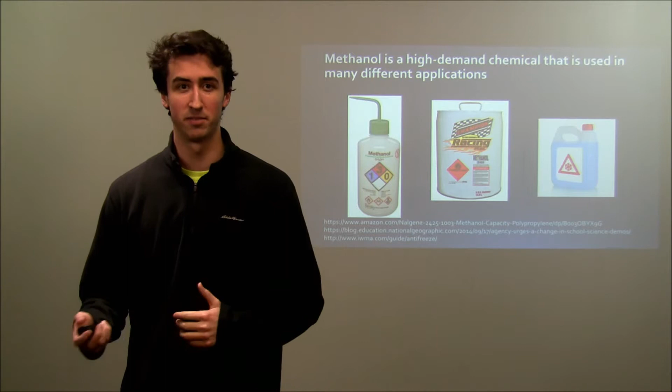So let's move on to each phase. The first part of our design is the natural gas cleanup portion. This is critical because we need to remove impurities such as elemental mercury and hydrogen sulfide from our feed stream, which are found in large quantities. They can do severe damage to materials such as heaters and compressors, and reduce the purity of our methanol product. Starting with the mercury removal units, we used 2 adsorbent columns packed with sulfur-impregnated activated carbon to remove the mercury.

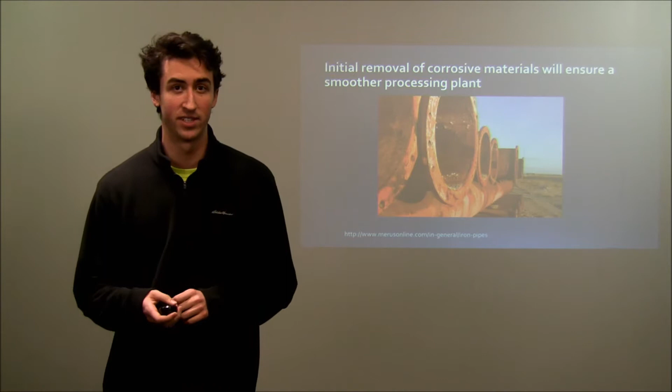Moving to the next section, the sulfur removal units, we used an amine absorption and regeneration unit with monoethanolamine as our absorbent. This removes all acid gas because monoethanolamine has a high loading content for acid gas, and that was the decision behind that factor.

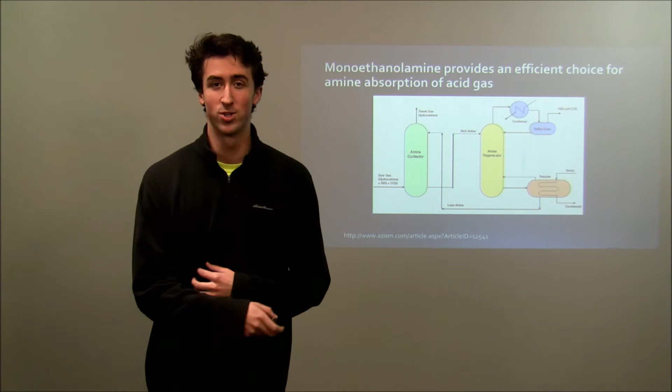Moving along to the next portion of the design, Niall will talk a little bit about the pre-reformer and the reformer part of our design.

Thank you, Mitchell. My name is Niall Robinson, and I worked on section 2 of our methanol production process, which features the pre-reformer and reformer reactors. After the desulfurization unit, we're converting methane and heavy hydrocarbons into syngas, the intermediate between methane and methanol production. Synthesis gas is needed to produce it.

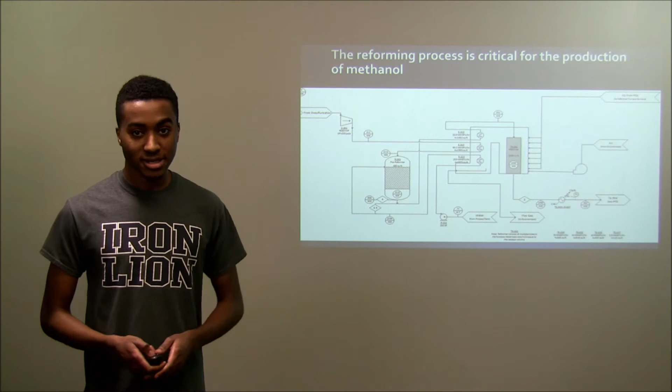The first process is the pre-reformer, which cracks the heavy hydrocarbons into methane and water, and this stream is fed into the reformer where methane is converted into synthesis gas. The pre-reformer is essential because it allows us to utilize the heavy chain hydrocarbons in our feed. Without it, these hydrocarbons would go to waste and either compromise our methanol purity or require more work to separate from the methanol product. By using the pre-reformer, we convert these heavy chain hydrocarbons into methane and then into synthesis gas, so we're not wasting our feed.

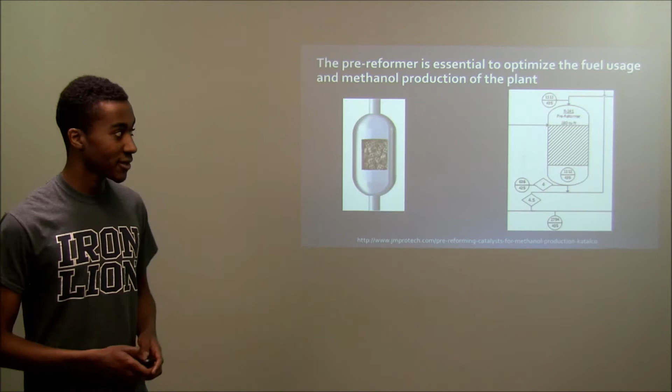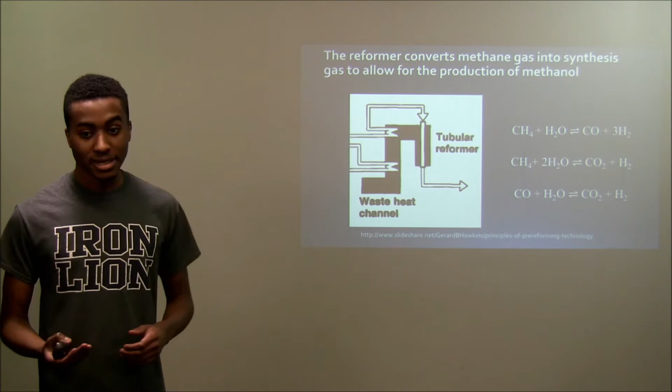In the reformer, all of the methane and water is used to produce carbon dioxide, carbon monoxide, and hydrogen, which is our synthesis gas. It was determined that the optimal temperature for the reformer would be 1500 degrees Fahrenheit, allowing us to get the needed specs of molar concentrations of our synthesis gas. The reformer features numerous tubes where the feed stream is fed through and heated, and when it comes out at the bottom, we have our synthesis gas production.

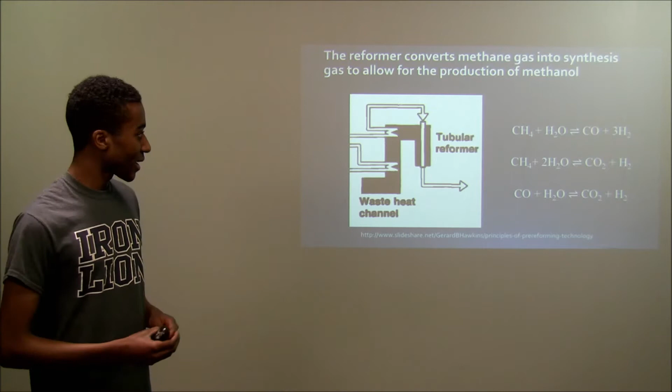After this, it goes into the PSA unit that Mike's going to talk about. So I'm going to hand it over to Mike now so he can talk to you about the third section of our unit. Thank you, Niall, for the introduction.

Now that we've seen the reforming process, I'm going to go through the third section of our methanol plant design, which is where we take the syngas from reforming and turn it into methanol. Before we can move to a reactor, though, we need to make sure that the composition of our syngas is optimized for production of methanol.

So to avoid these problems, we chose to use pressure swing adsorption. The approach here is to remove hydrogen from our feed stream until we reach this desired ratio. This is achieved by adsorbing all the components in our feed except for hydrogen at high pressure, and then once the column is saturated, desorbing at low pressure and feeding all of those desired components to the methanol reactor.

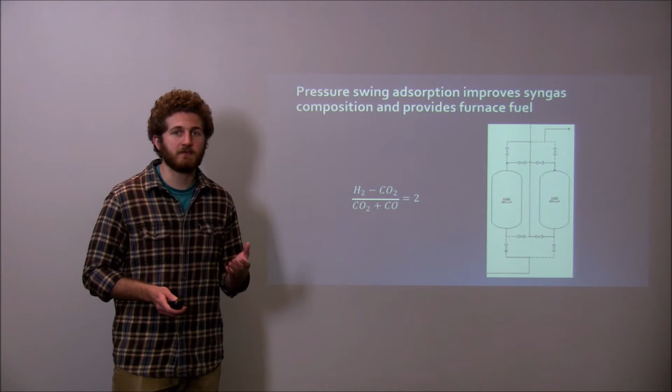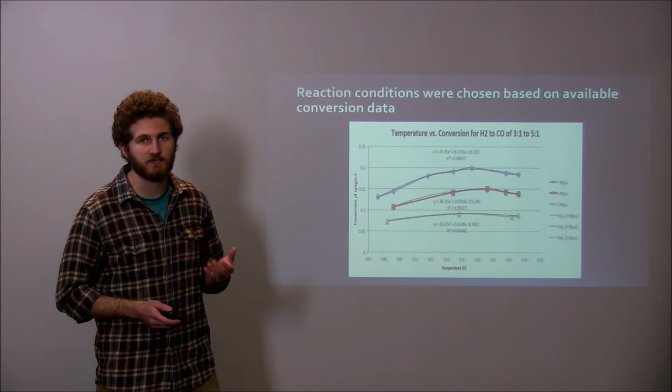We compressed our feed stream to the desired pressure and heated it before feeding it to the reactor, which would operate at these same conditions. The design that we chose was the Lurgi methanol reactor design.

It's a well-established and proven method of producing methanol, and it's popular in industry because it allows for essentially isothermal operation. So with its cooling system and its shell and tube design, you can operate right at the temperature that you need to maintain the conversion that you want and have a constant concentration of methanol in your outlet.

The reactions that take place are these four simultaneous reactions here, two of which produce methanol, and then one produces your side product ethanol and one your side product methylformate.

This reaction system has a high exothermic heat of reaction, which the Lurgi methanol reactor is able to remove through shell side cooling. Water at the reactor pressure is fed in, and then when it's released at low pressure, it flashes to steam and can be used in other process systems.

The reactor also has 258 tubes packed with catalyst. We used Katalco 51-7, where the reaction actually takes place.

And the effluent from these tubes is fed to a vapor-liquid separator after cooling. All of the non-condensable components, so our syngas, which is our remaining reactants, and any other vapors, are fed to a recycle so that we can take advantage of any unused reactants.

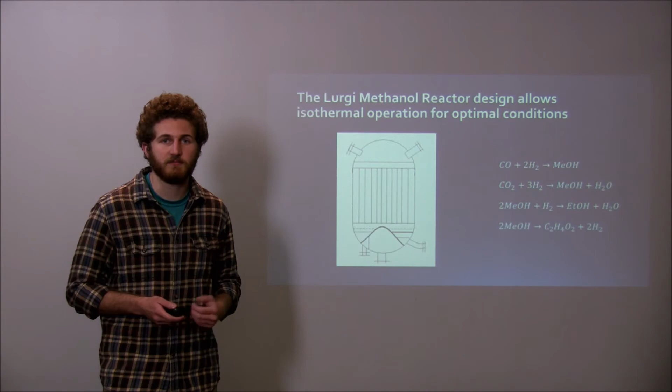Hi, I'm Katie, and I'm here to talk about Section 4 of our methanol production facility, which is distillation and purification. Distillation is a purification technique that uses relative volatility between different components to separate them. For our specific case, we have two distillation columns, a refining column and a topping column.

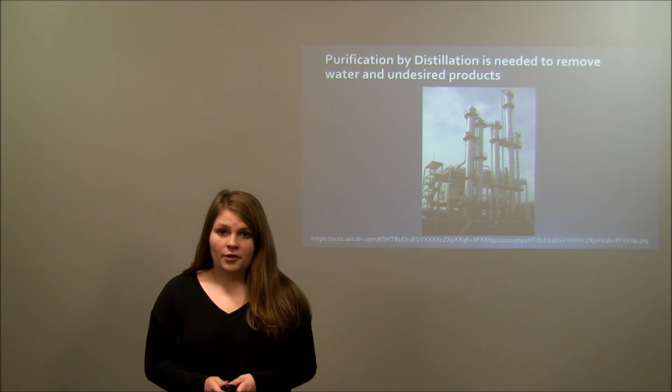First, our components enter the topping column, which separates the light ends from the crude methanol. In the topping column, we have methanol, ethanol, methylformate, and water. The light ends are mainly comprised of ethanol and methylformate. These two components come out of the distillate, which are then recycled for fuel credits.

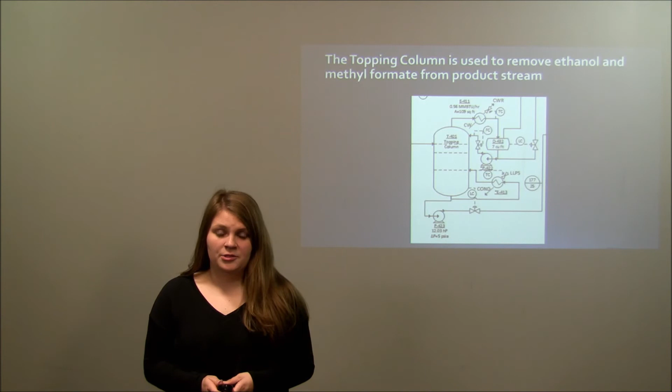The bottoms are made of water and methanol. These two components are then transferred to the refining column at about 20% water and 80% methanol. The refining column then separates water and methanol. Methanol comes out of the distillate at about 99.85% purity, which is our target goal. The water is then coming out of the bottoms and is transferred to a facility for wastewater treatment.

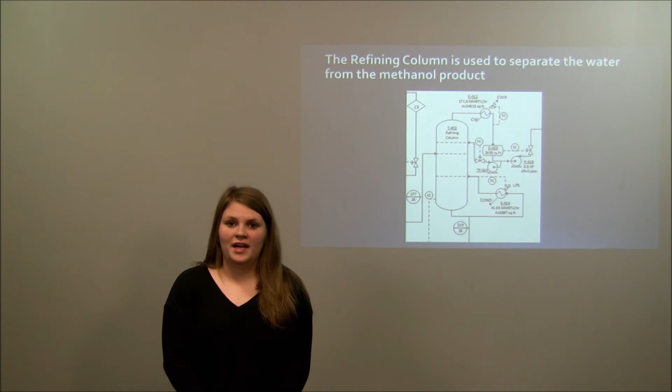Now that we've finished our design process, we can talk about the economic analysis of our plant. First, we will be talking about capital costs. Capital costs are attributed to the inner battery limit, the outer battery limit, and contingency factors.

Our inner battery limit was based on the equipment that could be calculated in our Icarus program and additionally from other bids received in previous years. This is equipment such as heat exchangers, compressors, drums, and towers. Our equipment that could be calculated from previous bids would be things like our reactors and our PSA system.

For the outer battery limit, only previous bids from other years were used. This calculates things such as site development and raw material and product storage. These are based on an estimate. Our contingency factor was 20% of that total and then totaled to $390 million for our total capital costs.

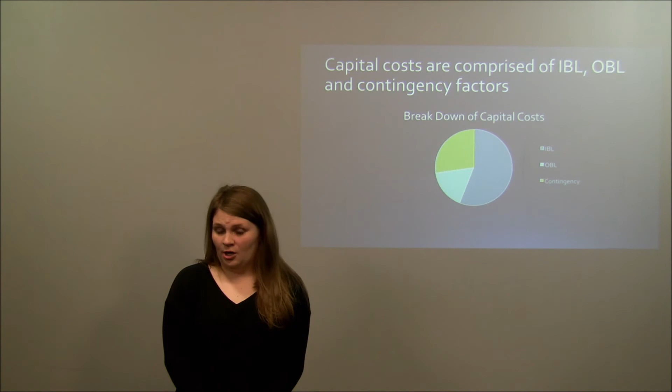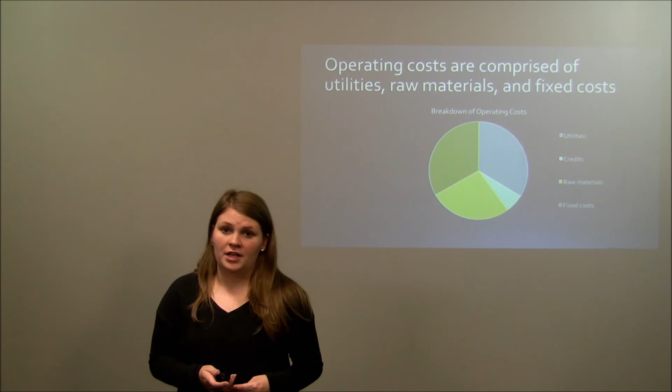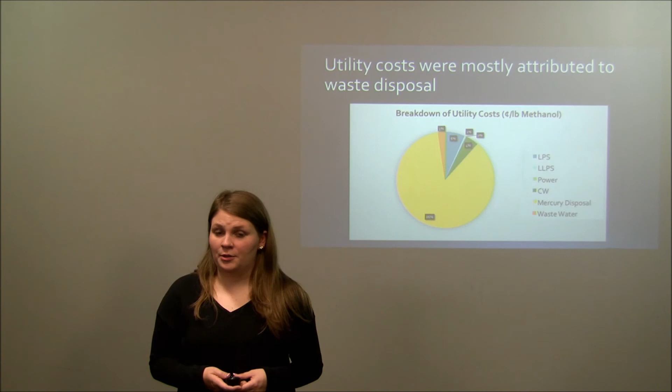To lower this cost, it would be prudent to find a different natural gas feed stream that has a lower impurity ratio, just because it would be easier to design equipment that would require a lower percentage removal of mercury, and additionally would also lower capital costs for raw materials because there would not be an activated carbon requirement to be replaced every 2 days.

One of the reasons that the heating and cooling utilities makes up such a small percentage of our utilities overall is because we generate our own fuel within our plant. Our pressure swing adsorption system, which removes hydrogen from our feed stream to get a desired ratio, produces pure hydrogen, and we are able to use a percentage of this pure hydrogen to heat our reformer furnace and allow our reaction to syngas to be completed.

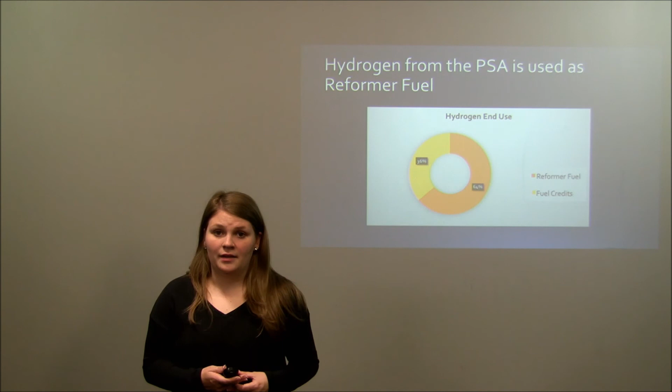The hydrogen that is not used in this section is burned for fuel credits along with our purge stream from our recycle and our light ends stream from the distillation.

Raw material costs can be mostly attributed to our feedstock. This is because our natural gas price is high compared to our catalyst cost for our plant. To lower this price overall, we would need to select a different natural gas feed stream.

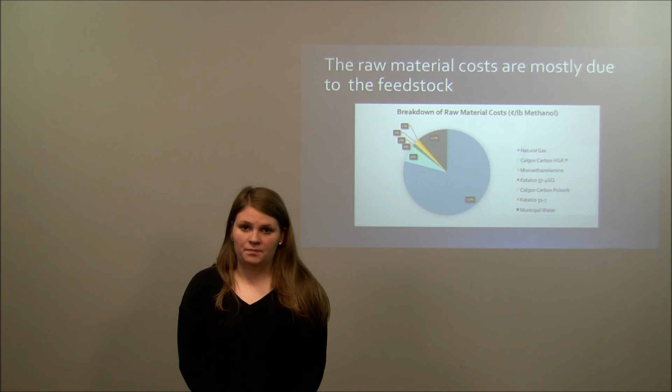Fixed costs, however, are dominated by taxes and repairs and maintenance. These factors are calculated based on our capital costs, which is a percentage overall. To lower these costs, we'd have to lower our capital costs, which could be done by either of the recommendations in earlier slides of changing our feed stream or just redesigning our plant.

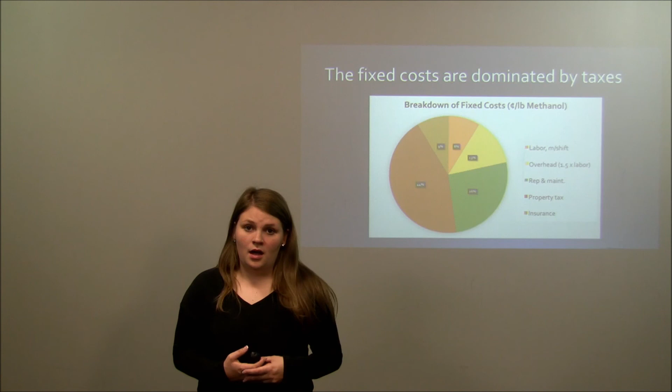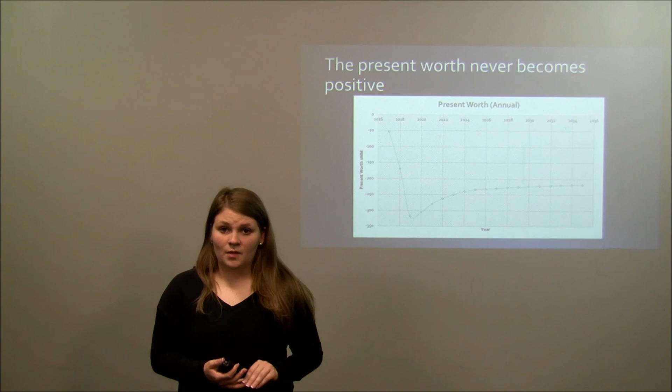In further economic analyses, we were able to determine our net present worth via a cash flow cycle. As seen in this graph, our net present worth never becomes positive, even though it does start to increase after our years of startup. From this, it can be recommended not to build the plant based on poor economic outlook. Our ATROR, or after-tax rate of return, is lower than 15% and calculated at negative 9.5%. Because this is so off from our goal, it is unlikely that this plant will succeed under current conditions.

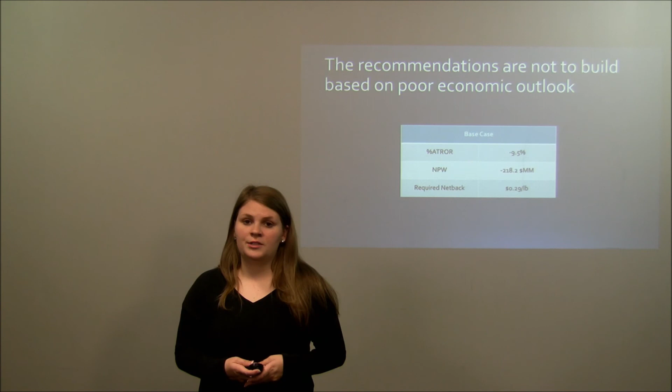Additionally, the net present worth at the end of our 15-year life cycle was calculated to be negative $218 million. And our required netback, which is the dollar amount we'd have to sell our product for to make a profit on our current design, is 29 cents per pound of methanol produced, which is over a 100% increase from our current market value of 12.5 cents per pound of methanol. Therefore, it can be recommended that making additional changes to the natural gas feed stream or redesigning the plant would be needed to continue with this study further.